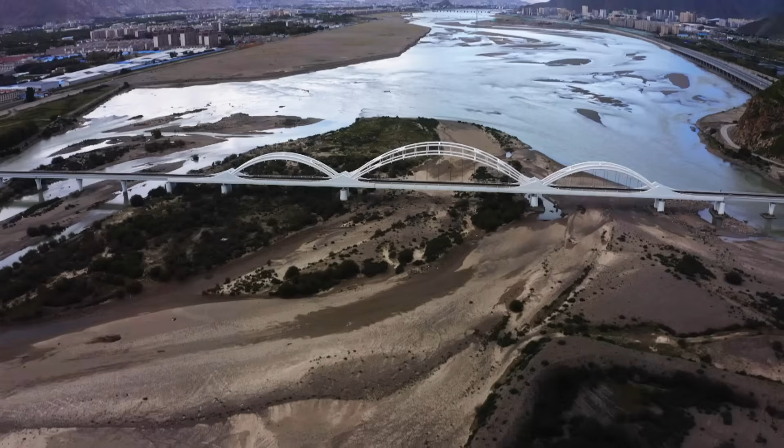From ferocious rivers to remote windswept valleys, uniquely engineered bridges crucially keep the world connected. But each of these crossings throws up individual challenges that are often seemingly impossible for railways to overcome. When you see that view, you can understand why it was so difficult to develop transport back in the 19th century. The Rosa line was very difficult to construct because this valley is a close, narrow valley with steep hills.

Well, the key challenge is the tidal range. The water flows in and out of a quite constricted channel very fast. But arguably the biggest obstacle facing bridge engineers is a hidden one. Bridges can help the railway overcome almost anything. They can conquer dizzying heights, span the longest lengths. But when it comes to crossing shaky ground, you need to think carefully before you continue.

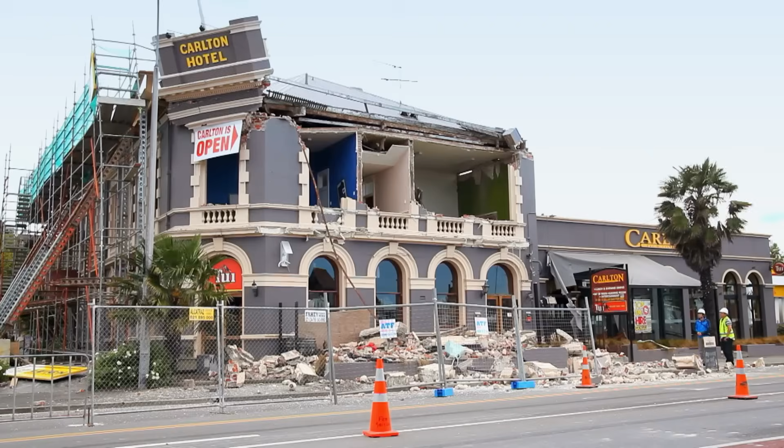Located on the notorious Ring of Fire, New Zealand's brooding volcanoes are a stark reminder it sits squarely on a major fault line, where the Australian and Pacific tectonic plates collide. Here, the devastating effects of earthquakes are an ever-present threat. Heritage advisor Karen Astwood has travelled into its rugged interior to see how engineering played its part in keeping a vital railway safe from seismic shifts.

What I'm approaching now is one of the North Island main trunk original tunnels. When the line was constructed in the early 1900s, it became incredibly important because it connected Auckland and Wellington, which are the North Island's two major cities. But by the 1960s, this particular section of the main trunk line in the Rangitikei district was putting the route in jeopardy. Many of the tunnels built were in danger of collapse. Upgrading this section simply wasn't practical. The unstable ground meant the tunnels weren't feasible to strengthen, and neither was creating new ones.

Instead, engineers came up with an ambitious plan to reroute the original line, known as the Mangaweka deviation. But in the way lay what appeared to be an insurmountable obstacle. This is the Rangitikei River, one of New Zealand's longest and most spectacular rivers. Today, Karen's taking an entirely different form of transportation to get an idea of the true scale of the problem.

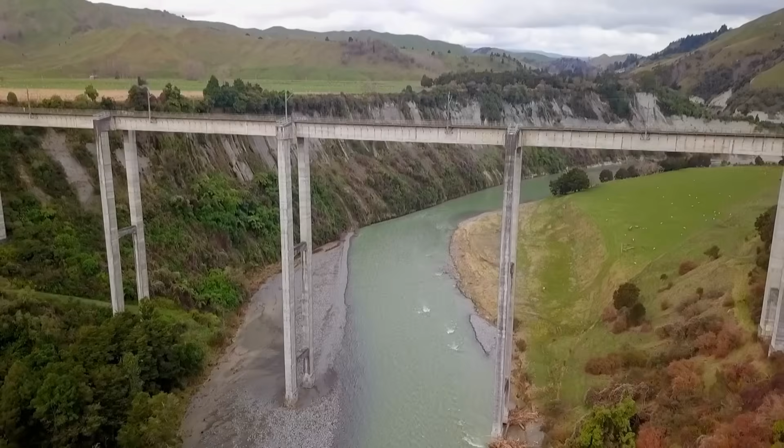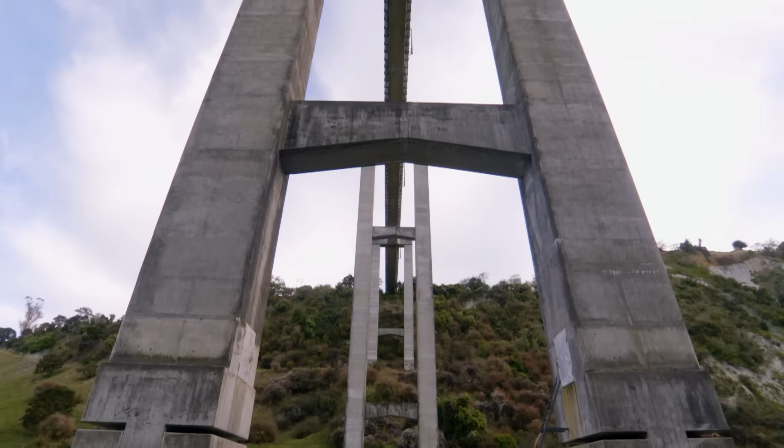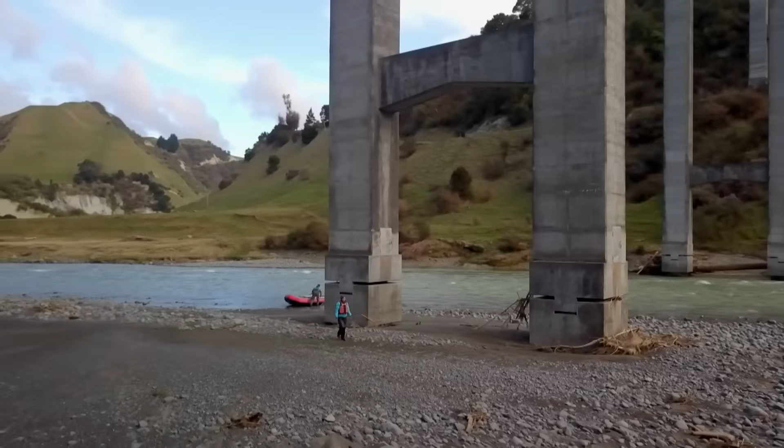And this is what I've been waiting for. Here it comes. This is the South Rangitikei Viaduct. It is immense. What an amazing structure. So impressive. Opened in 1981 and measuring a staggering 315 metres in length, the mammoth six-span viaduct carries a single track across twin-legged piers, a vertigo-inducing 78 metres above the river. Wow. But to see what makes this bridge truly revolutionary, you need to look much closer to the ground.

When designing the South Rangitikei Viaduct, engineers had to consider the earthquake conditions it needed to operate under to keep the critical North Island main trunk line functioning. It was the groundbreaking work of eminent earthquake scientist and engineer Dr. Ivan Skinner which provided the answer. At the time the Mangaweka deviation was being planned, seismic engineering technology was in its infancy. So the designers had to come up with a completely new solution: base isolation. The first of its kind in the world.

The bridge's innovative design features energy-absorbing dampers in the foundations, which allow it to step from side to side when a tremor hits. Okay, so we're just putting together a really basic demonstration to give you an idea about how base isolation works. To begin with, we've got a shake board, which is going to mimic the horizontal forces of an earthquake. Now, usually you'd build your bridge straight onto the earth. With the South Rangitikei Viaduct, however, we've got the foundations, then the base isolation, then the pier.

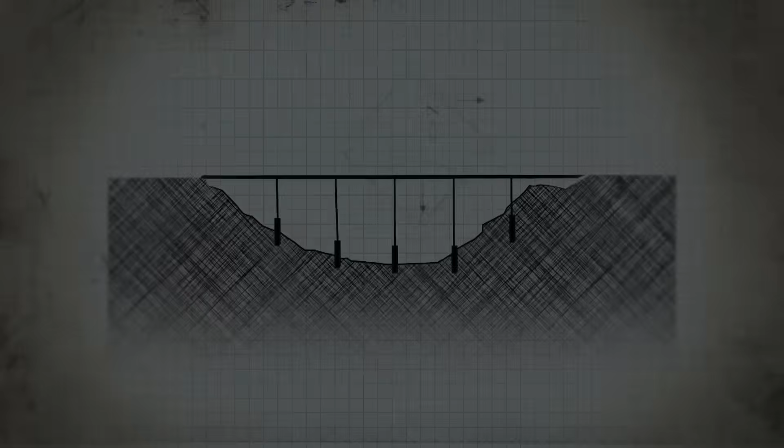Unlike traditional bridges, the foundations consist of two sections. One built into the ground and the other fixed to the bottom of each pier. At the base of each pier sits a set of rubber pads, which act to absorb a portion of the energy created in the event of an earthquake.

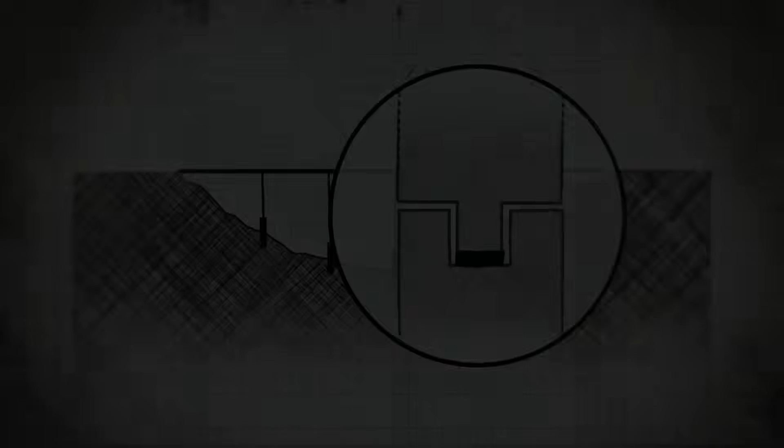So these tennis balls are standing in for the flexible bearings or pads that are in the base isolation. And this is a platform that the bridge pier is going to sit on. Okay, so now that we've got the foundations sorted out, we're going to build our piers. This is just a standard old bridge. Build it straight into the ground, onto the foundations.

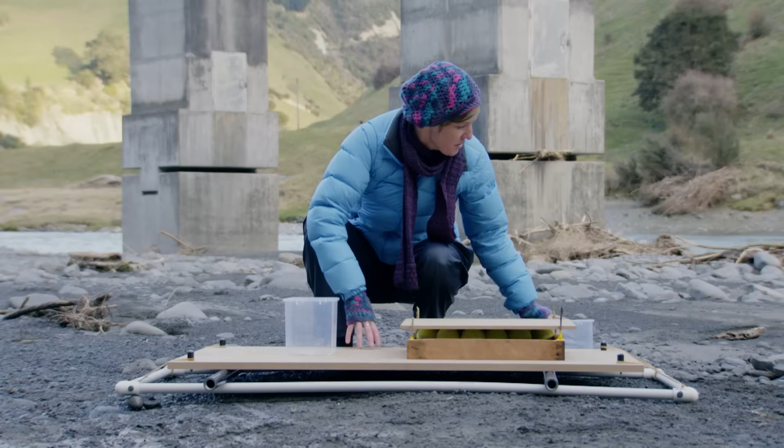And here is a pier from the South Rangitikei Viaduct. But to show you the full effect of how the base isolation works, I've just got to duck off and get some water. Rather than rigidly fixing the bridge, the base isolators effectively separate it from the ground for greater flexibility.

Okay, so here comes an earthquake. And as you can see, the one straight into the ground is absorbing all of the energy from the earthquake, so it's more likely to fail and the bridge collapse. While the South Rangitikei Viaduct, it's not absorbing as much of the earthquake forces, so it's less likely to fail in the event of an earthquake.

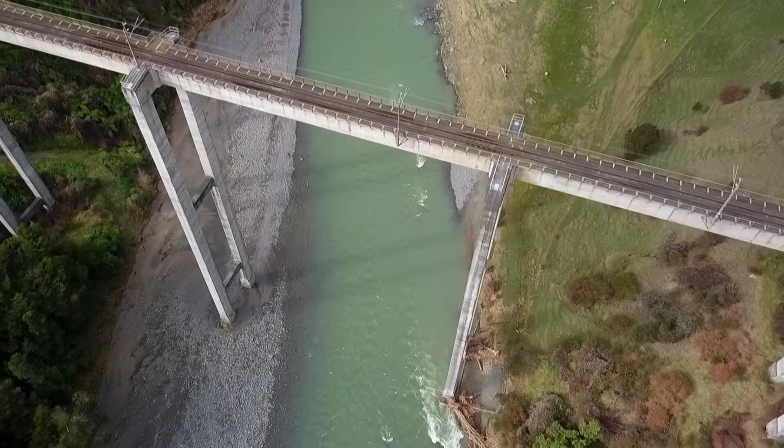Under most circumstances, the bearing pads absorb enough force to keep the bridge structurally intact. But in a major earthquake, the pier can lift up by as much as 13 centimetres, allowing it to step from one leg to the other, preventing a catastrophic collapse. And that's the genius of base isolation.

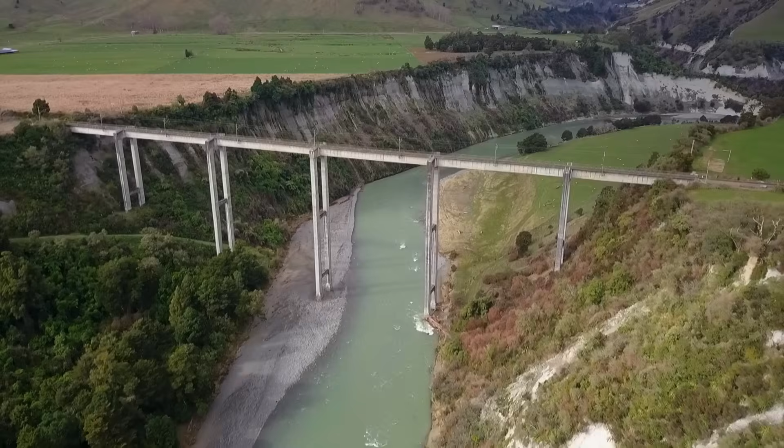Every day, Ivan Skinner's inspired innovation enables trains to traverse the length of New Zealand's rugged North Island, keeping the country moving even when experiencing the most terrifying tremors. Engineers weren't going to let earthquakes stop the railway. This is an ingenious piece of engineering, and I love it.

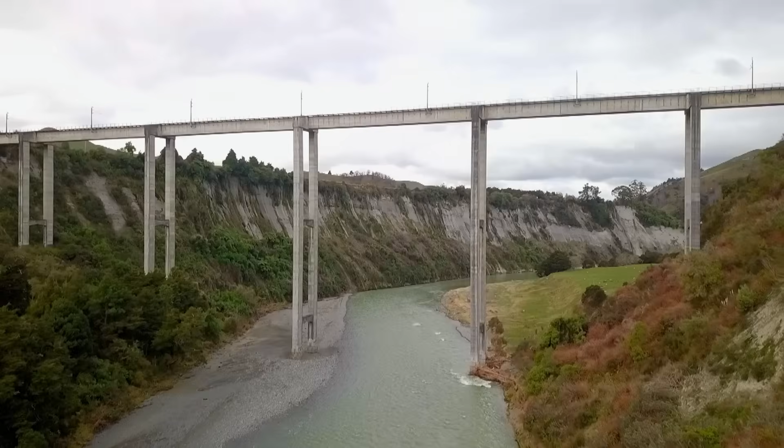Many of the world's most impressive bridges were built to carry the railroads. Ingenious structures spanning the deepest chasms. Building bridges is a fundamental part of railway engineering, but arguably the biggest challenges are posed by the elements. When the weather's on your side, riding the railway is a sunny proposition. And when it comes to bridges, clear skies can make for pleasant crossings. Unfortunately, Mother Nature doesn't always play nice, and the consequences can be disastrous.

Southern France's rugged Auvergne region isn't the most obvious place to build a railway. But at the end of the 19th century, transporting wine from the region's vineyards to the capital, Paris, became a priority. Forming a natural blockade, however, was the Massif Central, a sprawling landscape of imposing peaks, deep gorges, and famous for its strong winds.

Historian Patricia Rocher is taking to the skies and taking on the notorious turbulence. Wow. To get a bird's eye view of why plans to build a new line had hit the buffers. When you see that view from the plane, you can understand why it was so difficult to develop transport back in the 19th century.

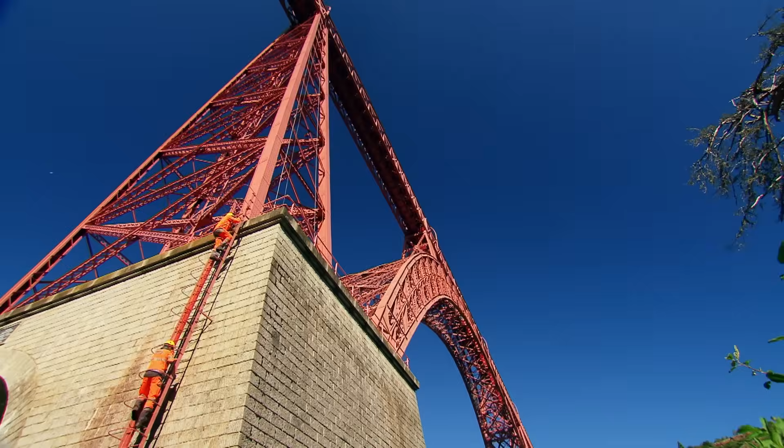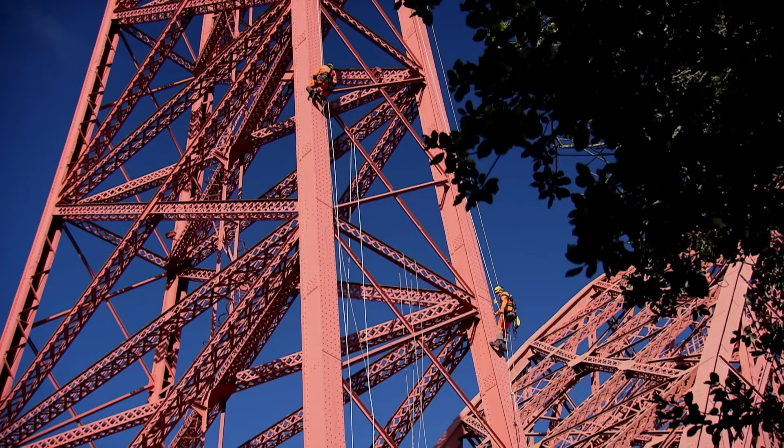Eiffel's solution to withstanding the gusting winds is today being viewed up close by the maintenance team tasked with inspecting this mammoth structure. It's one that would go on to earn him the nickname the Magician of Iron. The one factor was very important. He used structures with holes to let the wind go through. You can see on this viaduct the crosses, you know, and it's very typical of Eiffel style.

Instead of thick, solid girders, Eiffel used smaller, crisscrossing wrought iron beams with thousands of triangular gaps. His inspired design dramatically reduces wind resistance as it's buffeted by the powerful gusts at Garabit.

Just let me explain. You see here, the wind has no space to go through the structure and it falls down. Thanks to the hole in the structure, it's okay. You see, the wind can go through it.

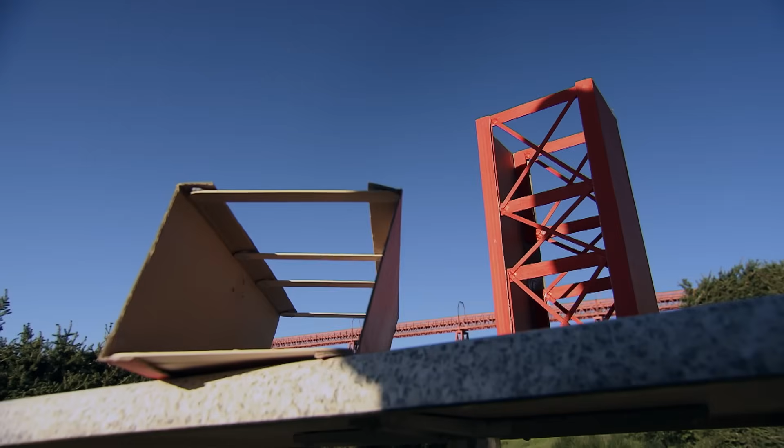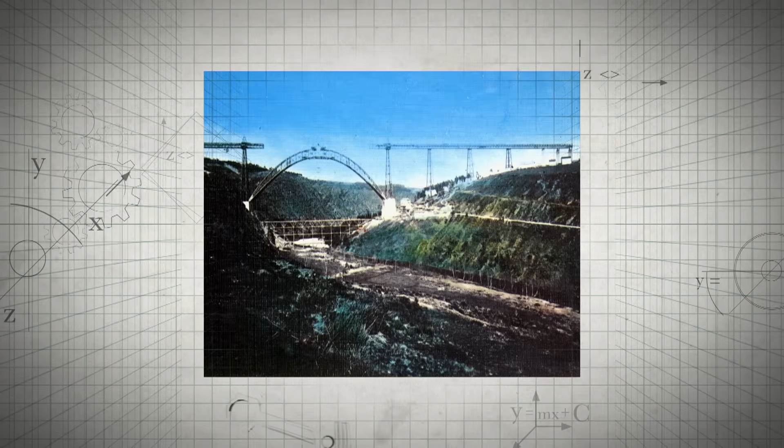Despite its lightweight appearance, the Garabit Viaduct was designed to carry a 400-ton train and built to last. The 165-meter-wide arch was constructed from both sides, as cranes at each end extended it piece by piece until the two halves were joined.

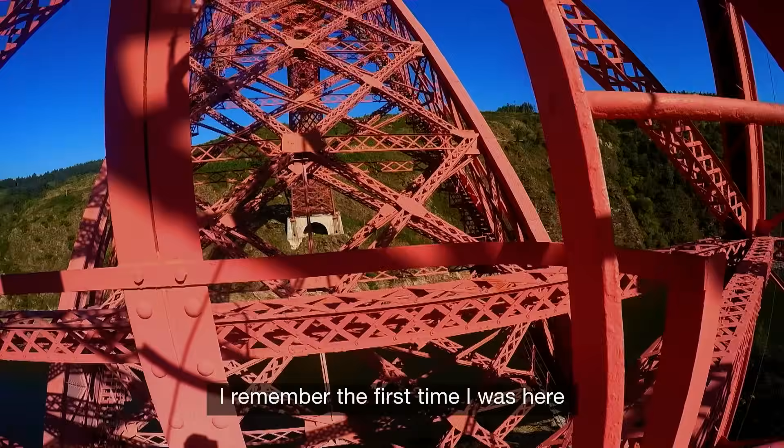Metal structures expert François Millien is part of the fearless team responsible for ensuring the bridge continues to stand the test of time. I remember the first time I was here, it was so impressive. Nobody can forget this. Taking 5 weeks to complete, each of the bridge's crisscrossed beams and 600,000 rivets are inspected for signs of wear.

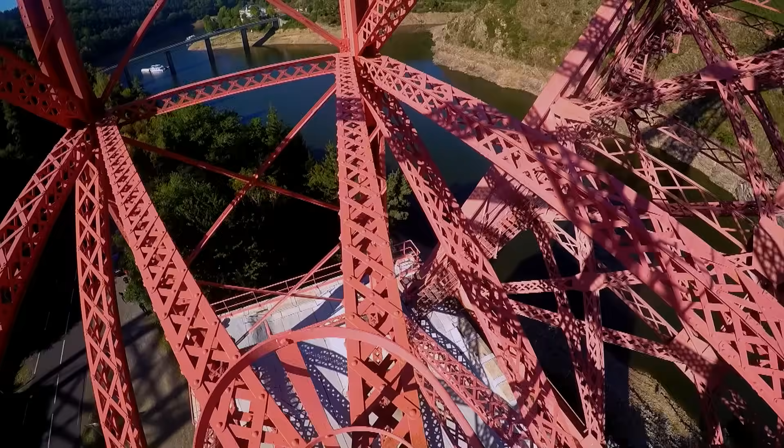Yeah, of course, when a train crosses the bridge, we can feel all the vibrations. We just need to look if we don't have some fissures or cracks. After another clean bill of health, this masterpiece is still standing strong against the brutal battering of the wind.

Eiffel's little-known masterpiece of railway engineering remains a stunning example of his signature style, that would later inspire a Parisian icon, the Eiffel Tower. It was a great achievement. This one is special because everybody in the world knows the Eiffel Tower, but they don't know this viaduct.

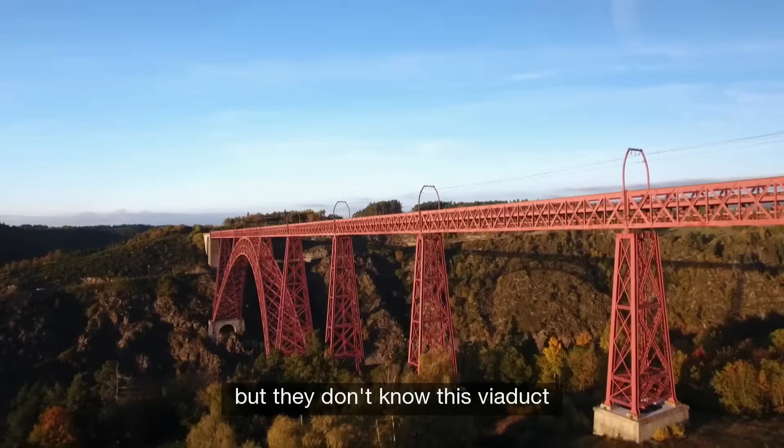We still are very proud of this viaduct. It's a special feeling to see such a structure in the air, in the middle of the countryside. This viaduct is really a celebration of French engineering.

Railway crossings. Engineering marvels connecting some of the world's most thrilling journeys. Requiring unique designs and ingenious thinking. Historically, bridges have been built from many different materials, even in the most extreme of locations.

Moving trains across mountains is never an easy task. To overcome the obstacles in your way, you'll normally need to build some bridges. But crossing heavy trains over vast valleys requires the right materials. And if what you've got isn't strong enough, you'll need to think again.

Home to the towering Alps mountain range, Switzerland's impenetrable peaks would make train travel impossible, were it not for the ingenuity and resourcefulness of its railway pioneers. Nowhere are the challenges they faced more obvious than the spectacular Rhaetian Railway. This iconic network of 10 lines clings to the steep slopes and valleys of the Swiss Graubünden canton.

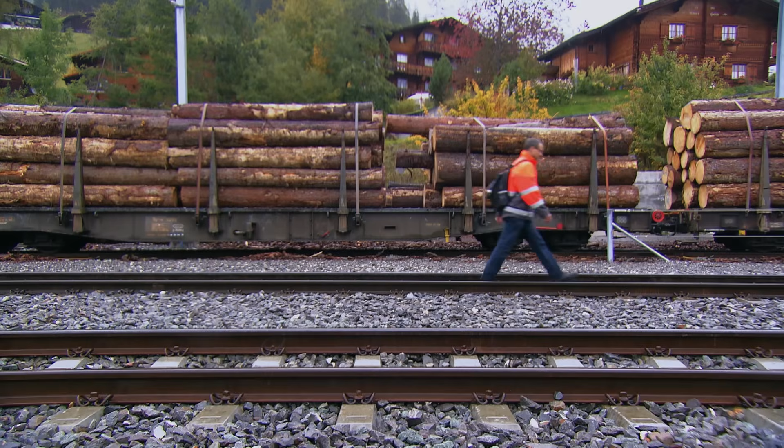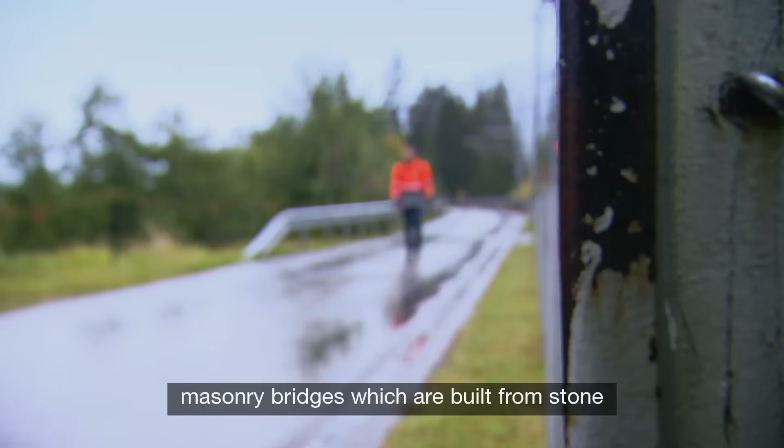The daunting task fell to civil engineer Hermann Schürch. He not only needed to design a structure strong enough to span the huge chasm, it would call for a groundbreaking approach to how it was built too. In the beginning of the century, most of the bridges were masonry bridges, built out of stones. And here between Chur and Arosa, we have no such stones.

Given the steep terrain, transporting large sections of solid steel was out of the question. Steel is not possible here because we only had the possibility to bring up 8-meter-long elements. The solution was the mighty Langwieser Viaduct, constructed from a material which had never been used to build a railway viaduct on this scale before.

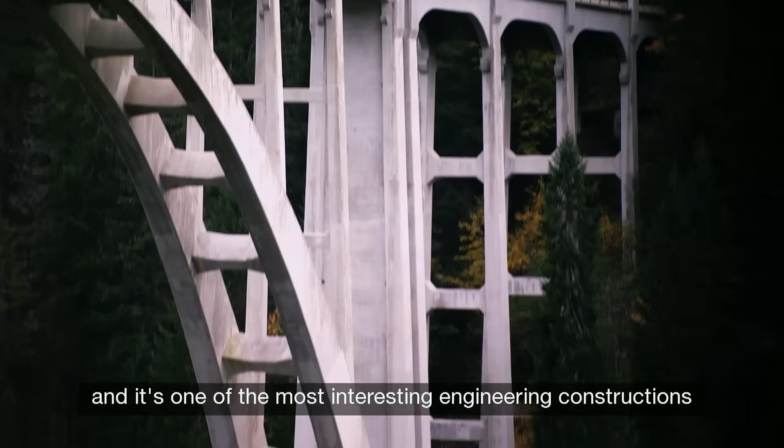Reinforced concrete. At 284 meters long, with a central arching span 100 meters wide. When it was completed in 1914, it was the longest concrete railway bridge ever constructed. Well, Langwies Viaduct is in my eyes the most impressive railway bridge, and it's one of the most interesting engineering constructions when you look over the whole world.

Of course, this is a very innovative bridge because it's a concrete bridge. Concrete with steel inside was a new material in that time. It's very modern construction, also today.

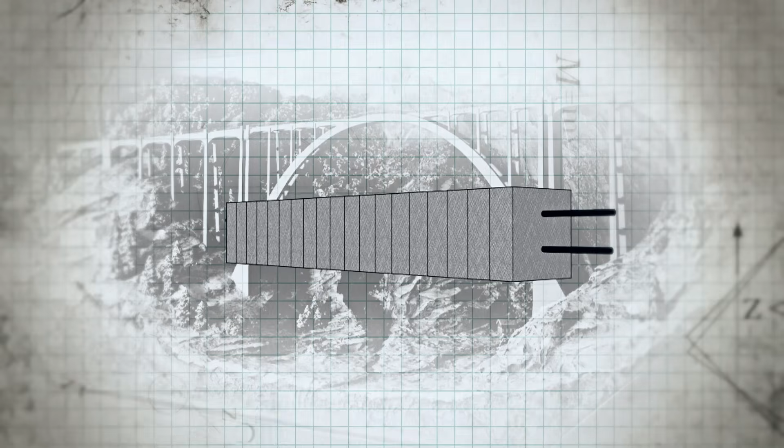To build a bridge strong enough to sustain the weight of trains across the valley in a single arching span, Schurch embedded steel within the concrete members of his structure. By reinforcing the concrete in this way, he could make use of both material strengths: steel to resist tensile or twisting forces, and concrete to resist compressive forces. It was a completely new design at that time.

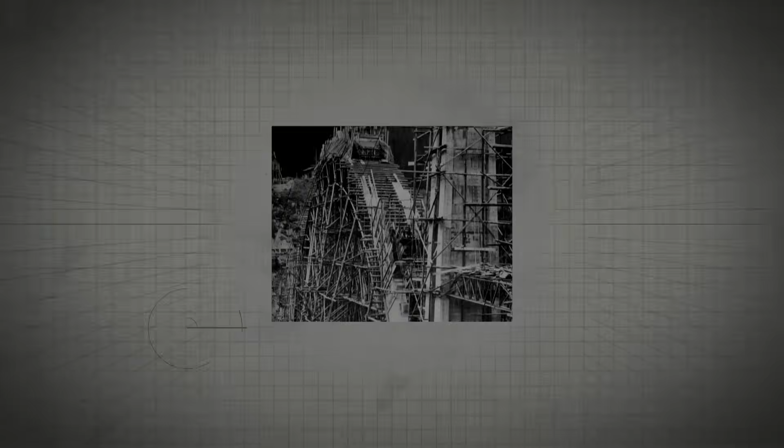Using a huge framework of wooden scaffolding for support, up to 200 men toiled on the project, ensuring its completion took just 2 years. Thanks to the vision and skill of the men who built the Langwies Viaduct, reinforced concrete conquered the giant gorge. It's very impressive, and it's a very great testimony to engineers of 100 years ago. And it changed the way rail bridges were built forever in the process.

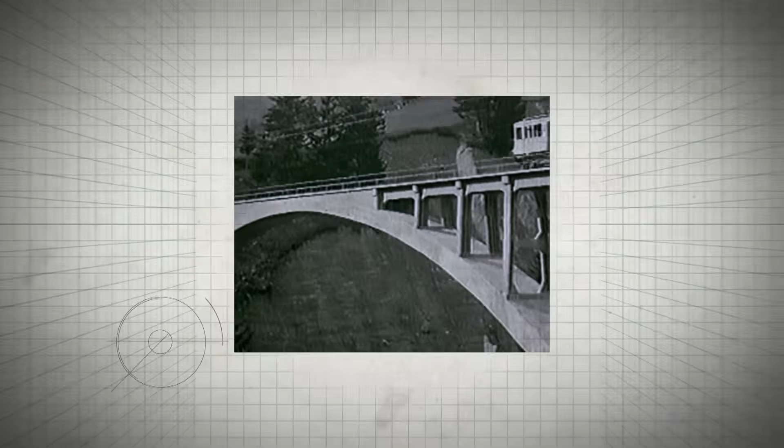When I stand here on the edge of the Langwies Viaduct in Langwies, for me it's a very impressive construction. I'm very proud. It's a work of art, of course. Across the world, pioneers have engineered new materials to create crossings. But in other locations, resources may be abundant, but the design takes some inspired thinking.

When it comes to building bridges, using piers and foundations is normally a winner. But what happens when there's water in your way? Tides and currents can make things tricky, meaning the only way to cross is to take your bridge design back to the drawing board.

In the 19th century, engineers faced the challenge of building a faster route connecting London and Dublin. In order to connect the two capitals, a new rail line would be needed that would run along the north coast of Wales. But to achieve this ambition would involve bridging a deceptively difficult stretch of water: the gaping Conway River estuary and its complex tidal flows.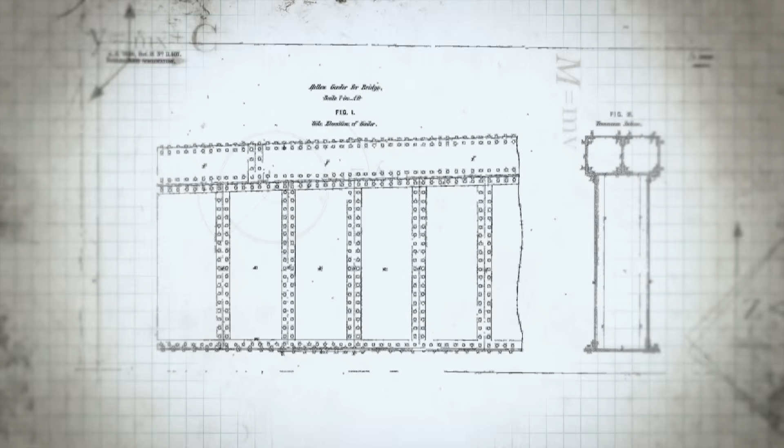It was the brainchild of two of Victorian Britain's most eminent engineers, Robert Stephenson and William Fairbairn. To eliminate the need for central supports, Stephenson's inspired idea was to carry trains through his bridge, rather than over the top of it. But the size of the span needed would push the boundaries of Victorian engineering like never before.

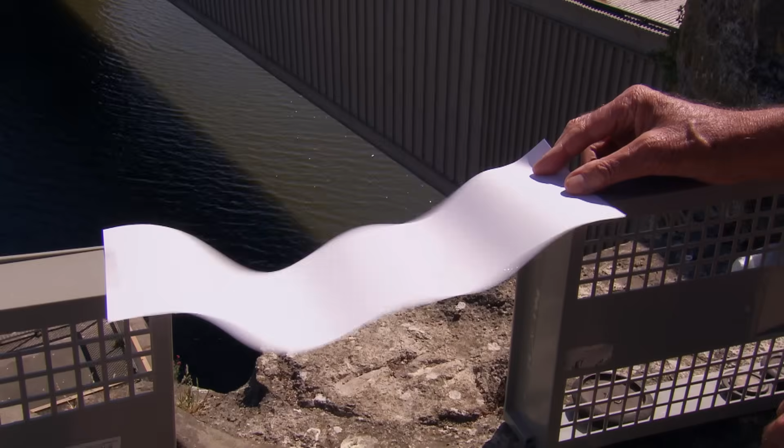To show the principle of a girder, we've got two piers of the bridge here. We have a girder, this piece of paper, which is very thin and wide. And if we put it across between the piers, it sags and won't even carry its own weight. The strength of the girder depends principally on its depth.

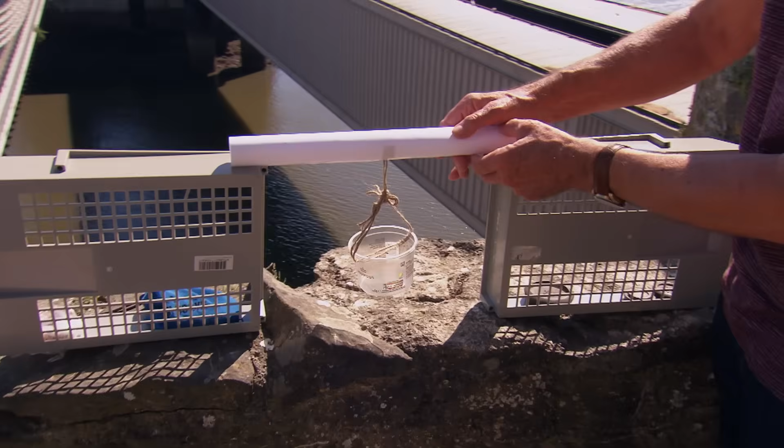To construct a girder strong enough, Stephenson and Fairbairn experimented with different shaped tubes. So the circular section already holds its own weight, and it will carry this little pot at the bottom here. I'm going to add some pennies to demonstrate how the beam works. 1, 2, 3, 4, 5... 70, 71, 72.

And as you can see, the tubular beam has failed by crumpling. With only a small point of contact between beam and piers, load stresses cause it to squash at the ends. So now we're going to take this rectangular tube and see if it outperforms the circular tube, which failed at 72 pennies.

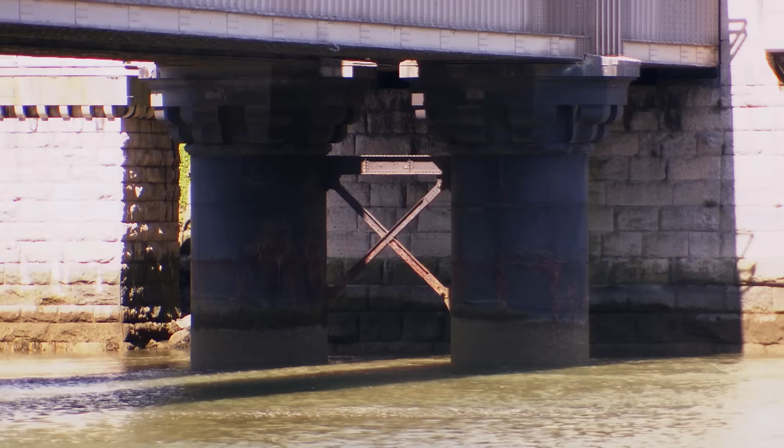72, 73, 74, 75, 101, 102, 3, 4. Having a larger surface area in contact with the supports each side of the river meant Stephenson and Fairbairn's box girders could carry significantly more weight over a longer, single span.

But overcoming the monumental challenge of crossing the River Conway didn't stop at the bridge's design. Constructing the enormously heavy spans in mid-air over the water wasn't an option. If you have the high tidal range and you have fast-flowing water, it makes it difficult to put temporary supports in the channel. Instead, its engineers turned to nature and ingeniously turned the Conway's treacherous tides to their own advantage.

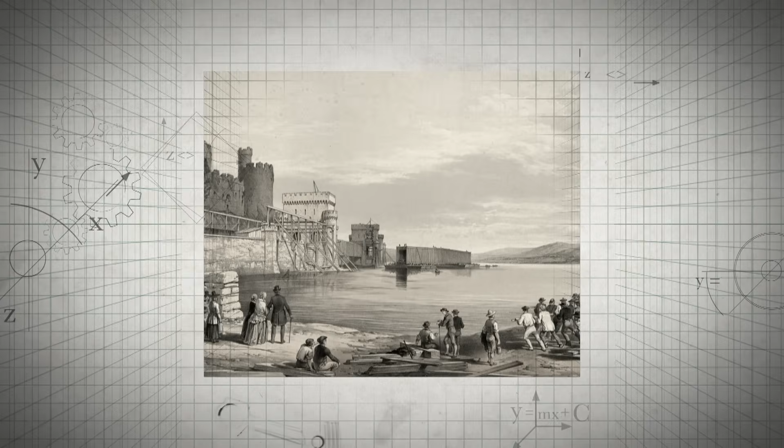The girder, made of wrought iron sheets and angles riveted together, was constructed on a beach nearby between the high and low tide marks. Once complete, large pontoons were floated underneath so it could be towed into position and lifted into place with hydraulic pumps. The high tidal range was actually used for the benefit of the construction process. As an engineer, I absolutely admire the teamwork that went into building this innovative bridge.

For its time, the Conway Bridge was a radical piece of railway engineering. By introducing the new box girder technology, it pushed the boundaries of what was thought possible and changed the face of bridge building forever. The Conway Bridge certainly moved the technology forward because this form of bridge construction has gone on to influence the design of long-span bridge beams worldwide.

And this groundbreaking feat of ingenuity is still part of Britain's busy rail network today. The Conway Bridge is a magnificent achievement. The fact that it is still standing here after 170 years is a testament to the quality of the Victorian engineering, and this certainly has stood the test of time.

Over centuries, pioneering engineers have built some of the world's most impressive railway crossings, making it possible for trains to conquer deep valleys, scale harsh mountain terrain, and cross wide tidal waters. But some of the most inspiring structures have been built from the very loads that trains travelling across them once carried.

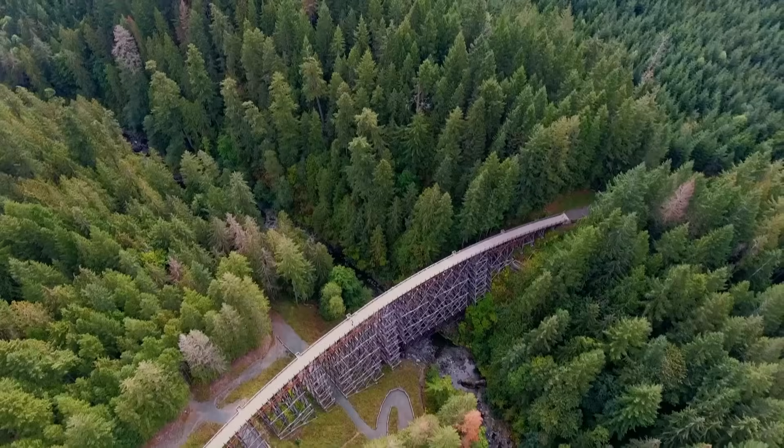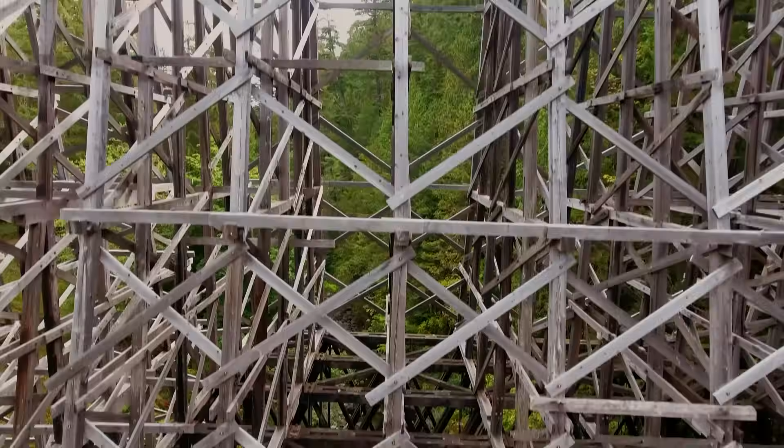The monumental Kinsol Trestle. Standing 44 meters high and spanning 188 meters in length, the Kinsol Trestle took an incredible 1.2 million board feet of timber to construct, making it one of the largest wooden bridges in the world.

I must say, even though I've been here hundreds of times, it always is a real treat to come back. It's such a great bridge. The wooden trestle was a vital part of Vancouver Island's valuable logging industry for nearly 60 years. The Kinsol is really a unique bit of engineering. You've got this quite ambitious crossing, the deep side here, complexity of the shape.

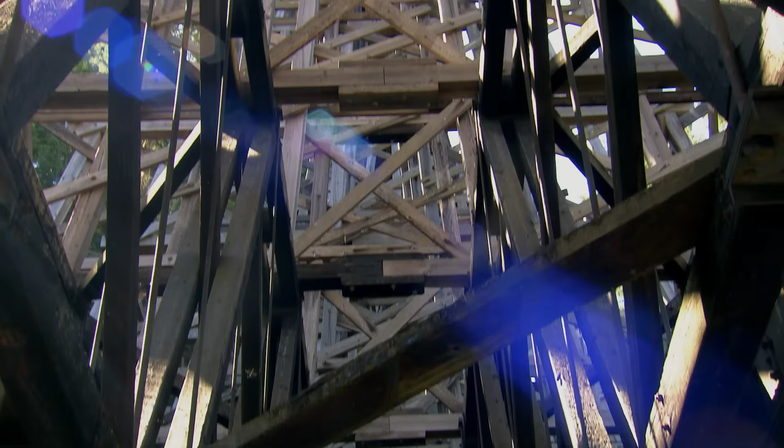A problem made worse each spring as the river levels swell with melting snow and ice, putting the timber to the test. You can tell just by looking at it that it was really built to perform heavy work. There's a section of the bridge which is quite long and has to be kept up above the highest water. That section of the bridge has to be entirely self-supporting. You can't build in the in-channel section or in the river section because, of course, it would just be swept away. To see just how the wood was engineered to conquer the river requires burrowing to the very heart of the bridge.

All the bears around here are vegetarians, I think. You should be reasonably safe.

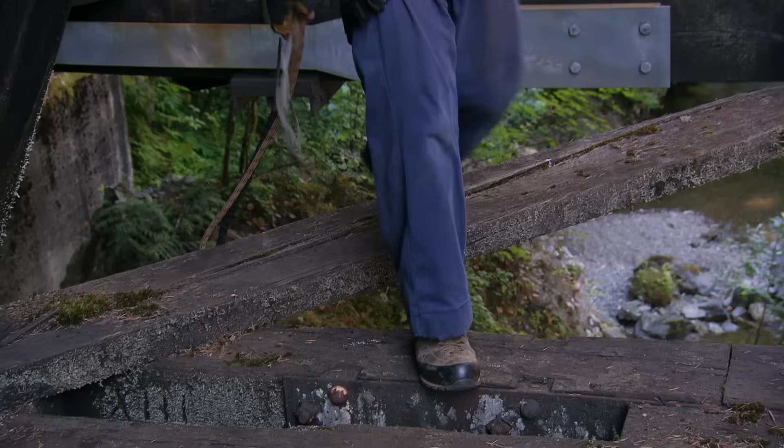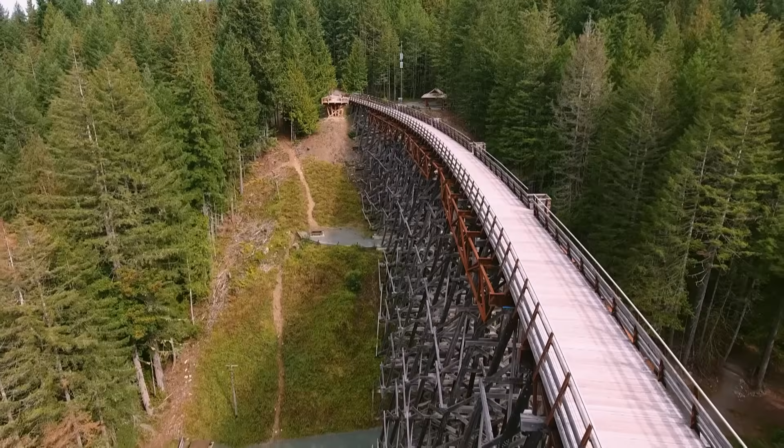So where we are now is down in the very working guts of the trestle. We're just making our way out into the Howe trusses. First patented by American bridge builder William Howe in 1840, his ingenious design made it possible to build bigger spans using wood, something in plentiful supply here. Howe trusses were great for these logging bridges because not only did they use a lot of wood, but you could use relatively small pieces or short pieces of wood.

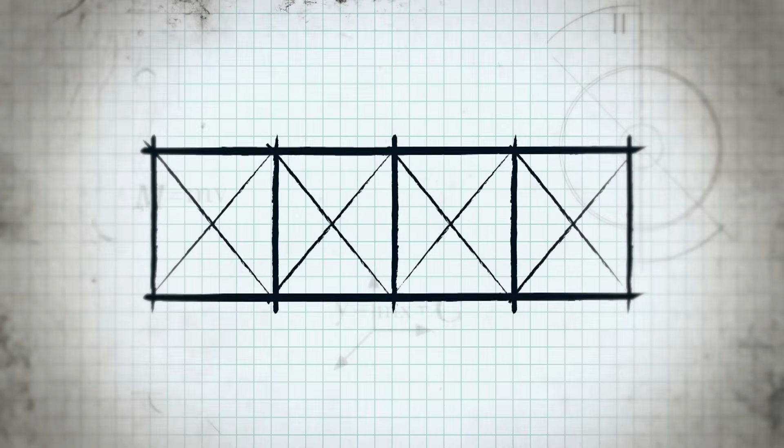In a truss, the three sides work together to give it strength. In a Howe truss, the diagonal wooden beams leaning towards the centre of the bridge are in compression, while the vertical metal poles are in tension. So generally in the web of the truss, the timber is doing what it's best at. It's working hard in compression. The other big advantage of a truss like this is that it's also capable of a great deal of work over that long span. So it can carry a heavy load above and make a big crossing.

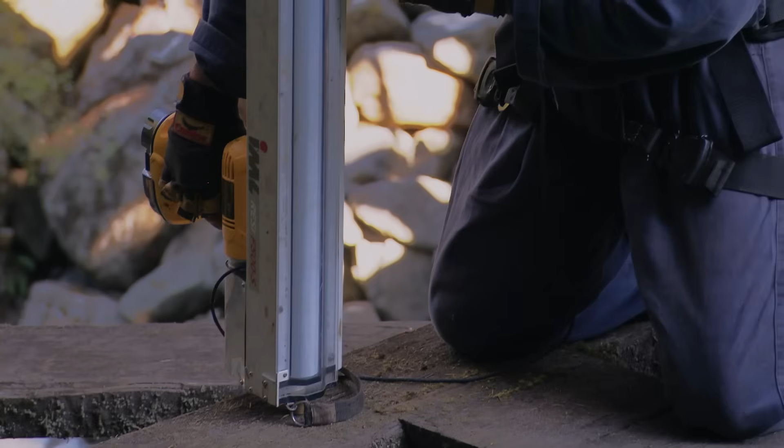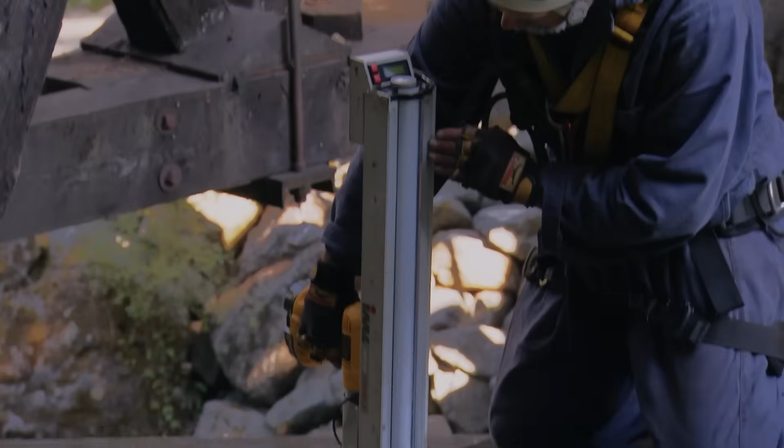Today, Gord is going to check just how well they're holding up after almost a century. So this is a tool called a resistograph, and it's a very slender drill. And as the drill advances, the onboard computer takes measurements of resistance. And we know that resistance is an indicator of wood strength. Boring into the timbers at key locations reveals if they are sound or suffering from decay.

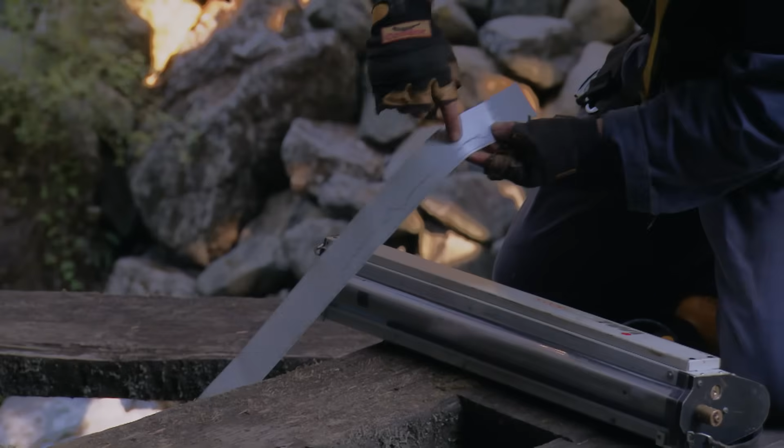Imagine that that scale represents the path of the drill bit. And these peaks are measurements of high resistance, and the flat spots like that, that's probably the very center of the tree, the pith, will be less resistance. So, clean bill of health. Although standing strong today, when the bridge closed in 1979, it quickly fell into serious disrepair. And in 2006, it was set for demolition.

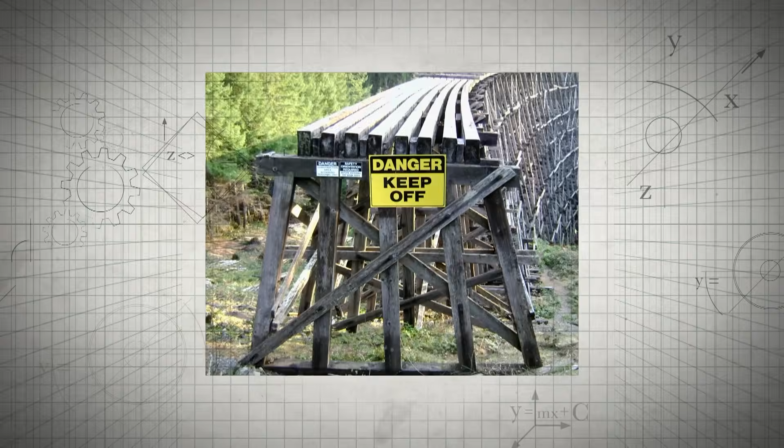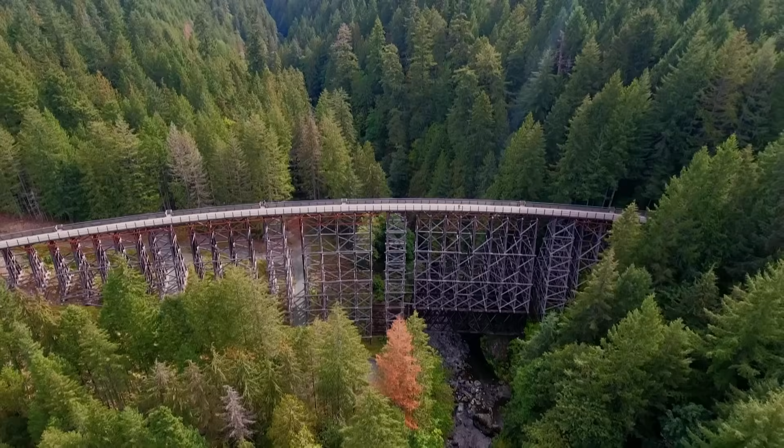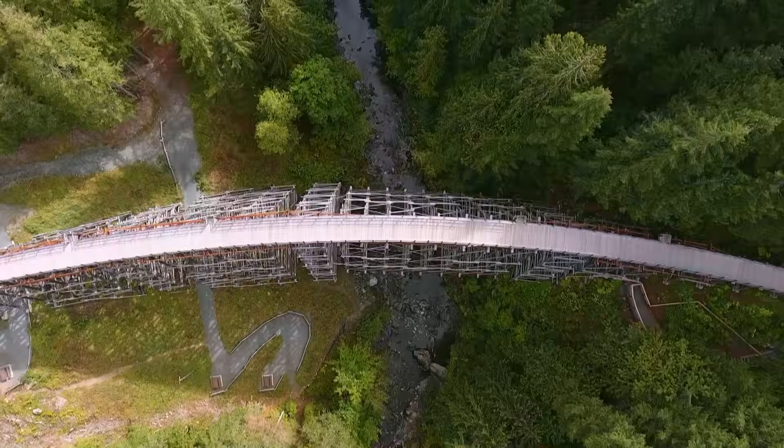But after 4 years of painstaking restoration, the trestle was reopened as the centerpiece of one of Vancouver Island's most popular tourist trails. People come from all over the world to see the bridge. They get an insight into just that age in the development of the West, when no task was too big and no undertaking too formidable. And nearly 100 years after its completion, the Kinsol Trestle remains a towering achievement in rail engineering.

These sorts of bridges are just a critical part of the railway, getting things from A to B. And one of the reasons we love them so much is because they just speak to that challenge overcome. The world's engineers are continuously pushing boundaries. And in the 21st century, there's one mega bridge in the making that will be capable of conquering all.

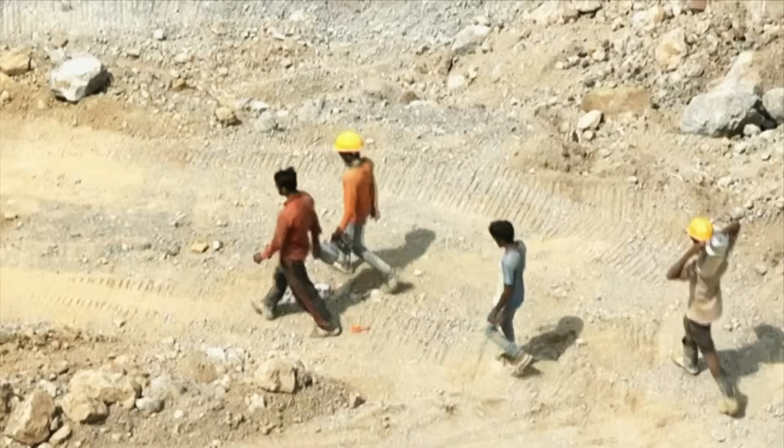India. Home to some of the world's remotest communities. None more so than a region within Jammu and Kashmir, bordering Pakistan at the foothills of the Himalayas. And it's here that a record-breaking railway project of epic proportions is underway. The region around Bakkal and Kauri is very, very remote, and it's very difficult to get around there. And so for a long time, there's been this will or this need to create a railway link.

The Kashmir Railway project is a 345-kilometre line that will connect communities amidst some of the most hostile terrain on Earth. That rail line has to go through tunnels and above bridges because of the really mountainous topography that we experience in the Himalayas. But in its path to completion lies a ferocious obstacle.

One of the trickiest segments of the entire line is where the railway has to actually cross over the river Chenab, and that's because the gorge is very, very deep there. So the distance from where the railway line is down to the surface of the river is over 300 meters. The only way of spanning this enormous chasm is with the world's highest railway crossing, the audacious Chenab Bridge.

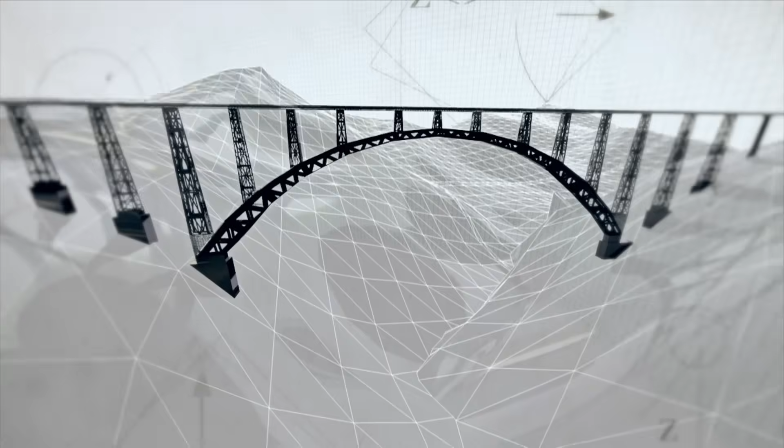At a staggering 1,315 meters long and towering 359 meters above the river, once completed, the Chenab is set to be a true giant of engineering. The Chenab Bridge is a record in the making because once it's finished, it will be the highest railway bridge in the world.

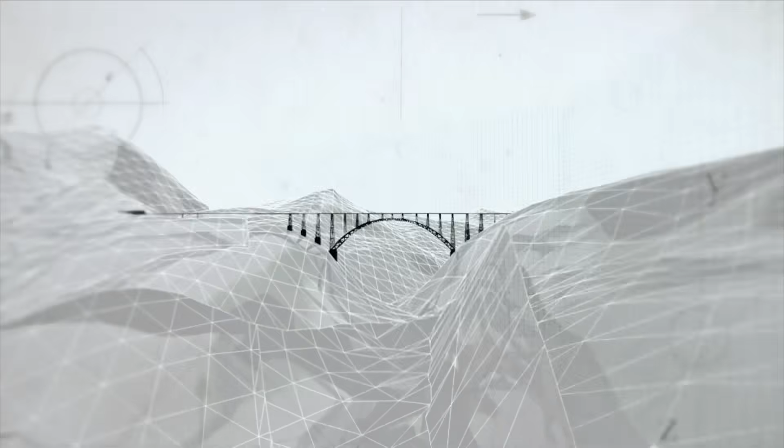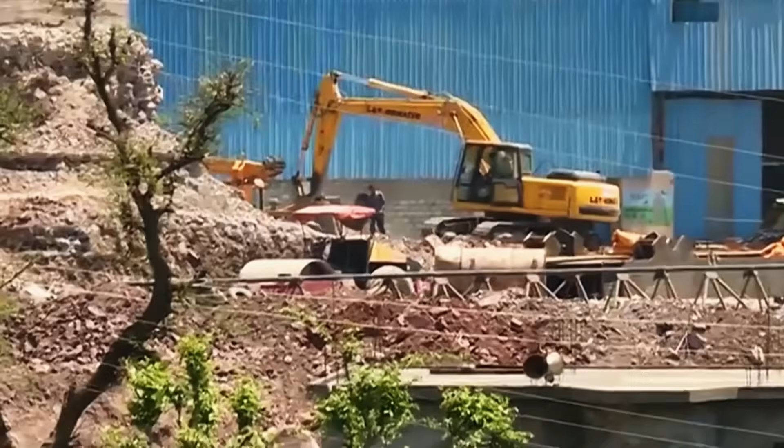But the most crucial phase of this epic project so far has taken place more than 100 meters below the valley's edge, preparing its foundations. No mean feat for a bridge of this magnitude. The bridge itself is only as strong and stable as the foundations upon which it's built. Engineering geologist Phil Ward has first-hand experience of dealing with the challenges facing the construction of the Chenab Bridge, not least because of its remote location.

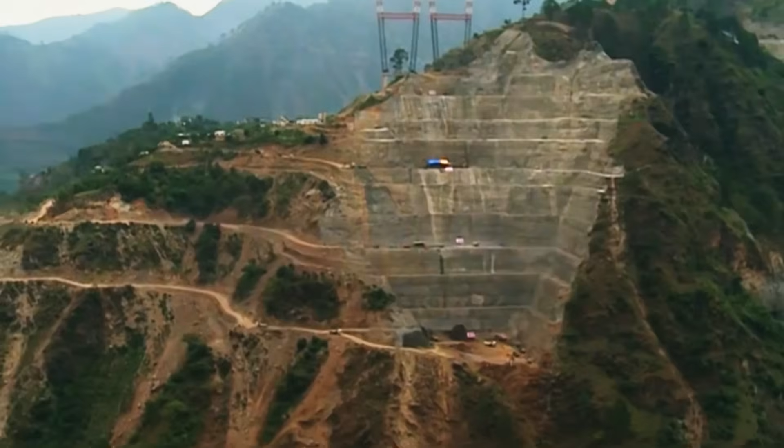When I first visited the site, it was a 6-hour jeep drive from Jammu up to the bridge site. The access roads were subject to landslides. The Chenab Bridge is crossing the Chenab River at a location where the slope angles are particularly steep, and surrounding the area of the bridge there's a lot of evidence of big landslides, so slope instability along the river gorge.

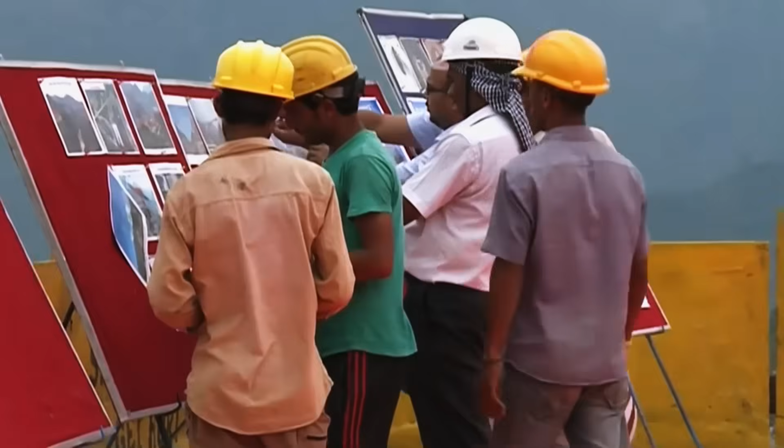It took 2 critical years of boring into the steep slopes to analyse the condition of the rock before engineers were satisfied that the bridge foundations could be constructed. Then, the colossal process of stabilising the rock faces began. These were the largest cut slopes I've ever been involved in, and a great deal of rock had to be excavated, and very, very large numbers of rock bolts had to be installed to stabilise those cut slopes.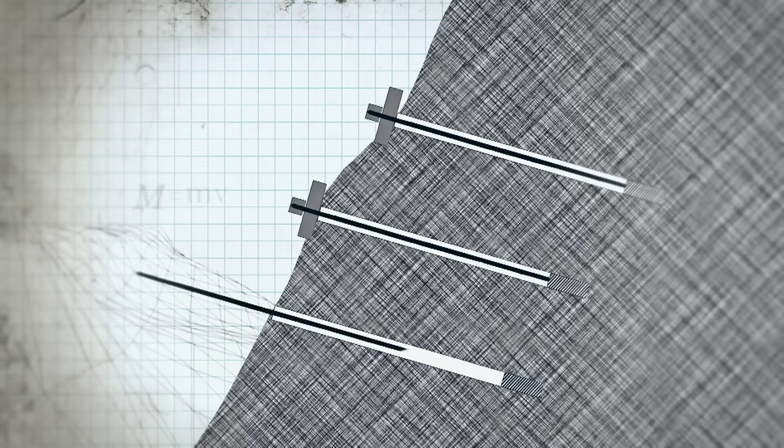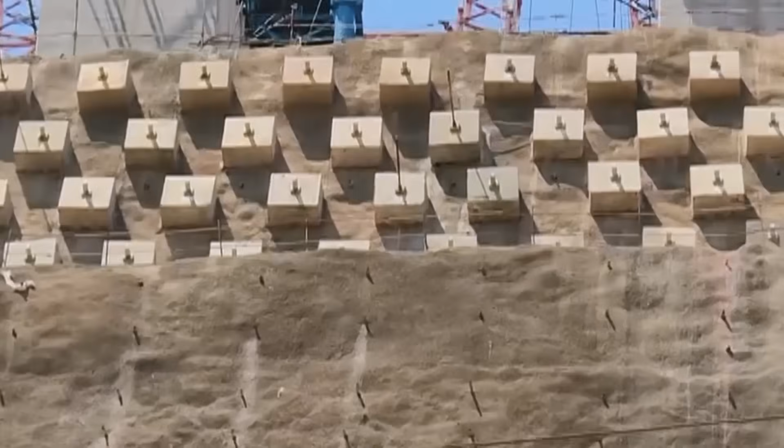Rock bolts are formed from grids of steel bars, some up to 40 metres in length, that are driven into the rock face and secured in position. Once inserted, the bolts help stabilise and strengthen the valley's walls, creating a surface that's secure enough to build on. These reinforced the rock mass and gave us assurance that we could provide an adequate factor of safety on slope stability.

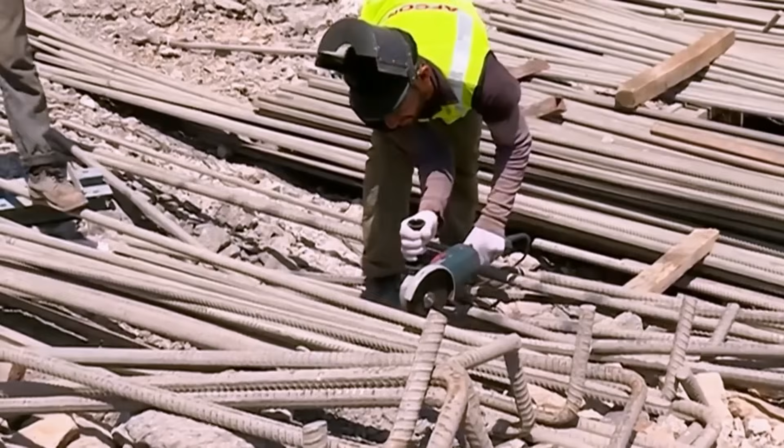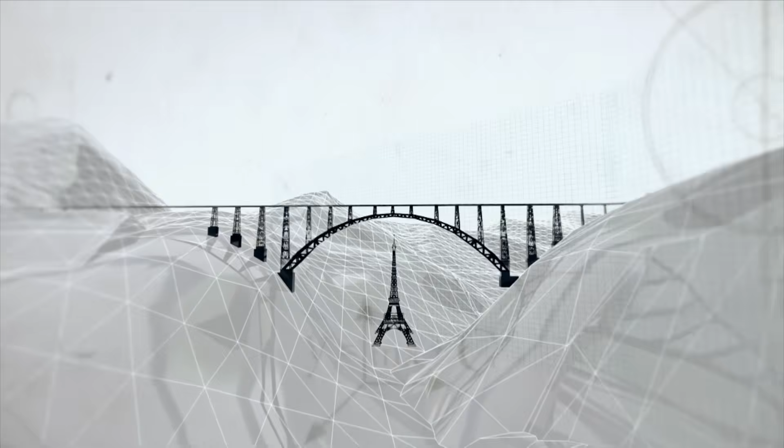Over a decade since its conception, the vast gorge is almost ready for the arch to span the river. However, this project still has years ahead of it, and many more obstacles to overcome before the bridge and this ambitious railway line is complete. The giant arch will need to withstand all that this volatile region can throw at it, from earthquakes to destructive winds and monsoon rains. But once complete, this monumental structure will dwarf the Eiffel Tower and set a new benchmark for mega bridges around the globe.

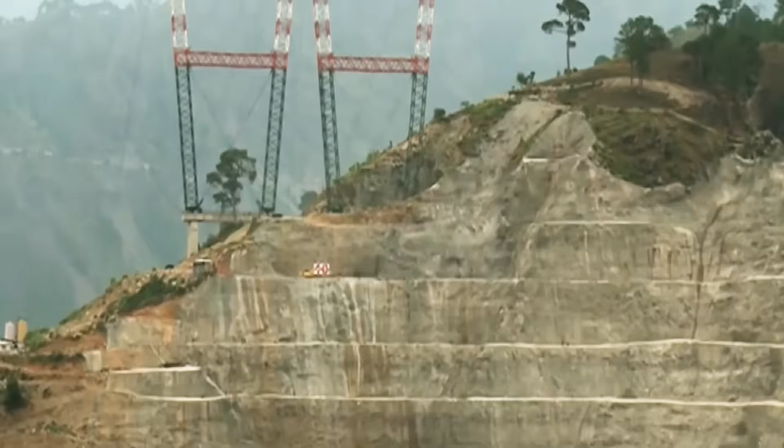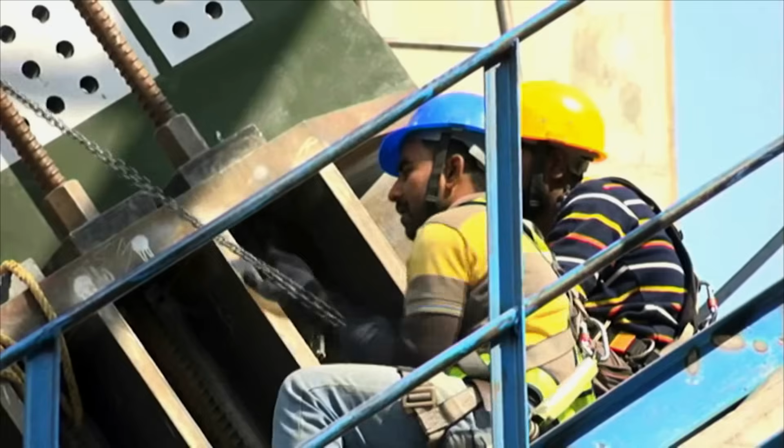For me, this has been one of the most exciting projects I've ever worked on. The scale of the project is mind-boggling in actual fact, and it always amazes me every time I visit the site as I come around the corner on the access road and see these massive rock faces dwarfing the tiny little vehicles that are traversing the faces. This project is testing engineers to the limit and will surely continue to do so. Meanwhile, the world watches challenge after challenge overcome.

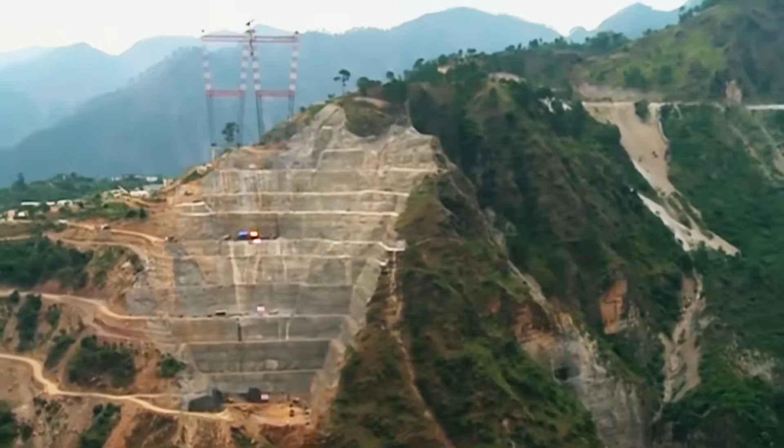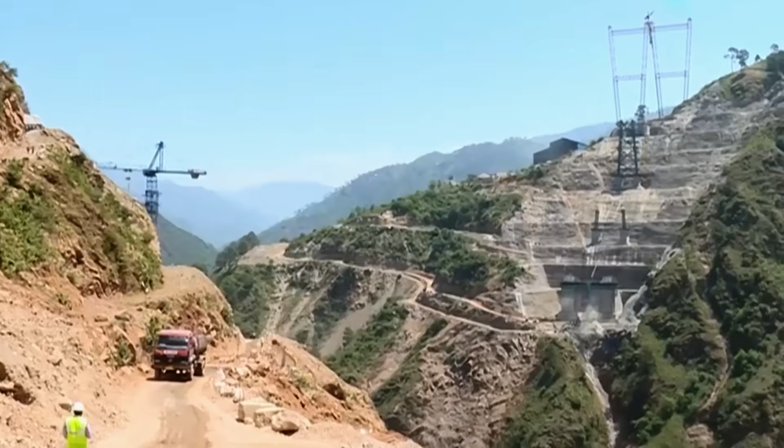I think it is so fascinating watching the progress of a record-breaking bridge like the Chenab Bridge. And I also think it's a real jewel in the crown for structures in India because it's had so many different complex challenges solved that it will almost set a precedent. Once this bridge is finished, I think it'll be one of the most impressive bridges in the world. It's a really, really impressive structure.

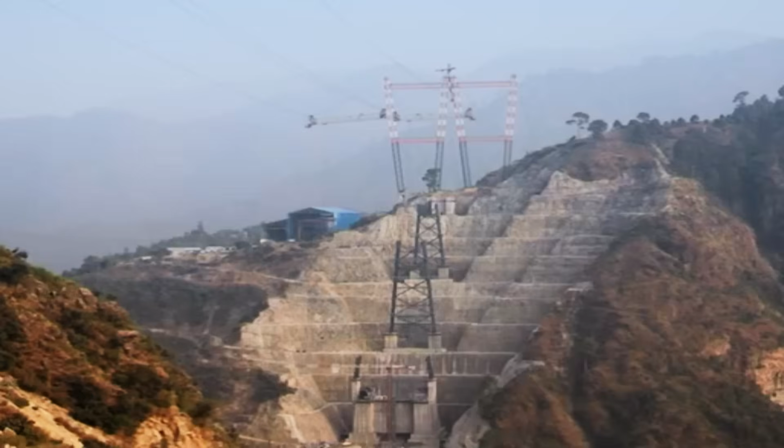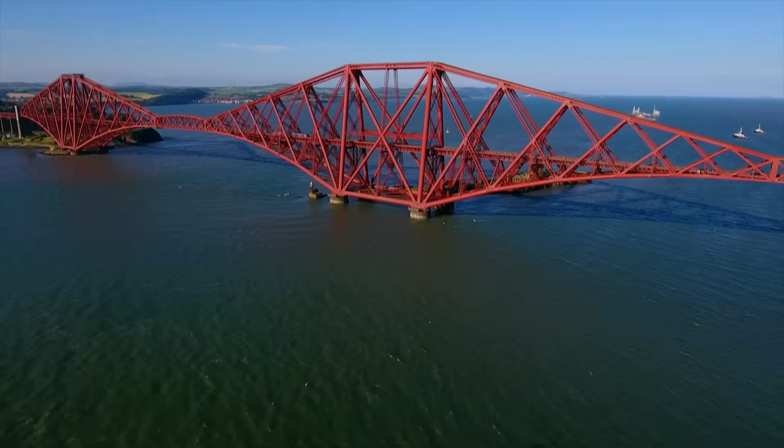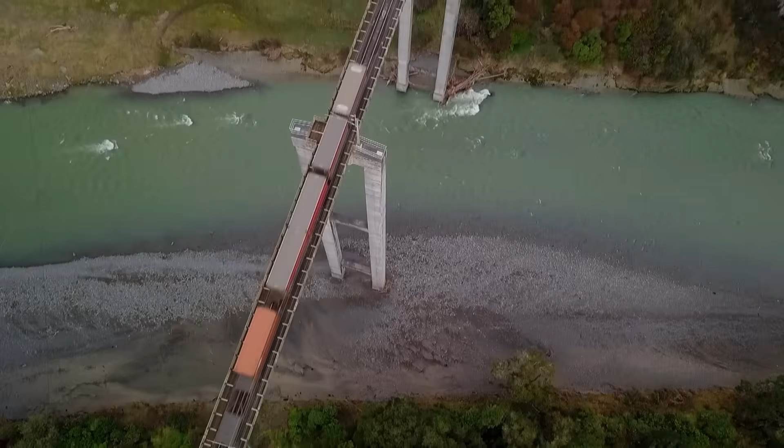Since the birth of the railways, bridges have opened up the world to trains, allowing them to cross seemingly unconquerable chasms. I hope at some point in the future I can travel across the Chenab Bridge and feel privileged that I was involved in the design. Thanks to inspired solutions. The base isolation used in the South Rangitikei viaduct was completely innovative at the time. Engineers continue to build their impossible railways. Every time we push a boundary, we then aspire to push that boundary even more, to break that next record.